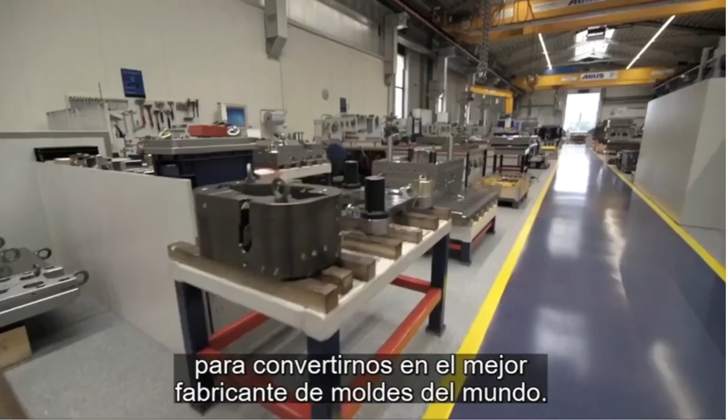It started 20 years ago, when I saw that we had 3-4 different programs in our company. We also had the issue that once you designed it with one software and once with another, the files looked nice, but in the end there were small details which were different.

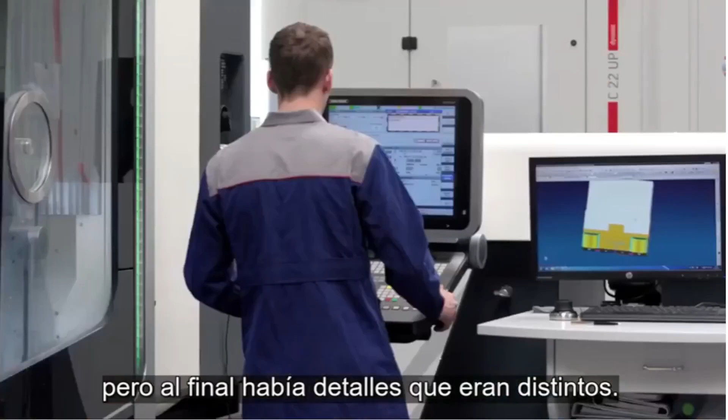Now that we focus on one system, it's easier to bring the part from one department to the other without losing accuracy. We are using Siemens technology in all our areas, so we have a streamlined process from the beginning to the end.

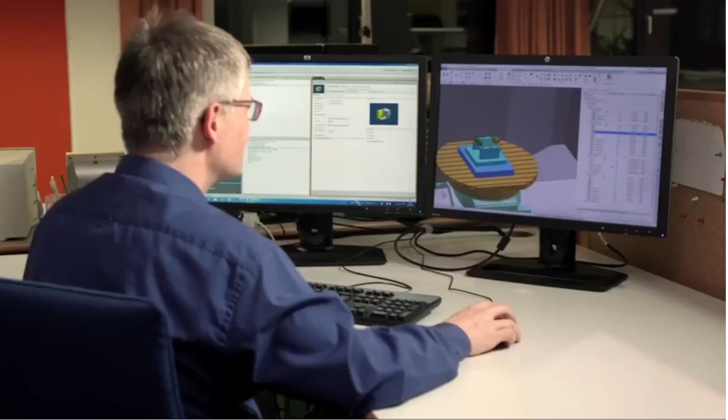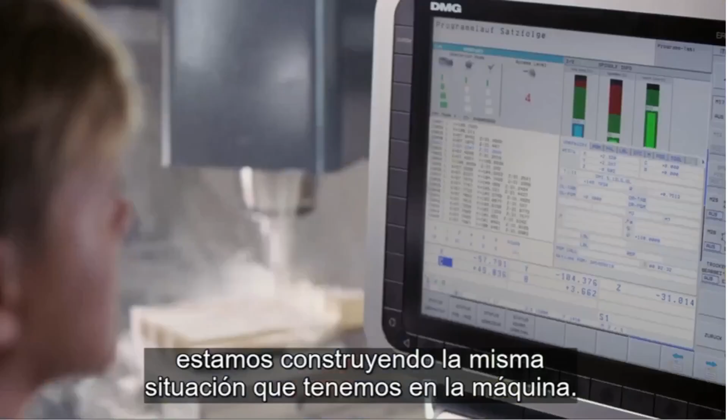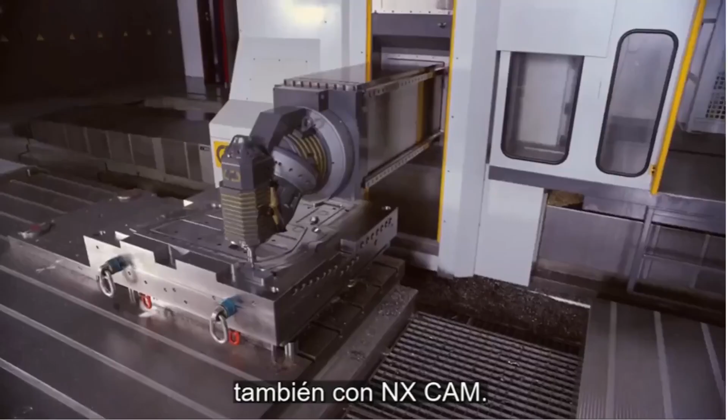It's especially important to have a digital twin in the virtual world, because in the CAM department we're building up the same situation we have on the machine. We are currently driving turning machines with NX CAM, 3-axis milling machines with NX CAM, and 5-axis milling machines also with NX CAM. It's always resulting in lower costs, but also in shorter delivery times to our customers.

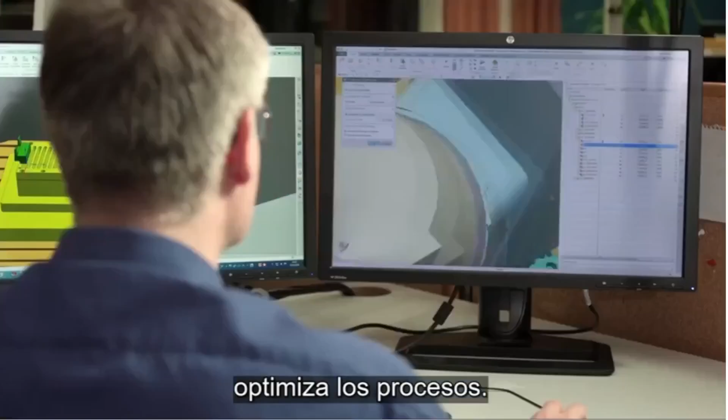Mold making has a lot of different departments, and where Siemens especially helped us was to bring all these departments together. The digital thread is the thing that streamlines the processes. Without the paperwork, we can start parallel processing.

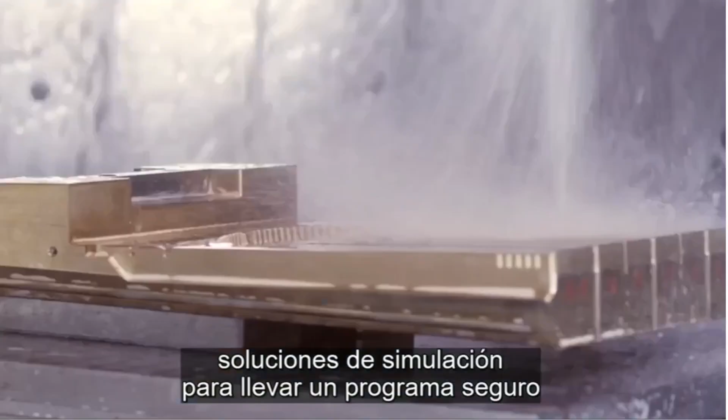They are using Teamcenter to get this part out of the system. They're using the NX CAM function to make the program for the machines. After the post-processing, they're using the simulation functions to bring a safe program to the machine.

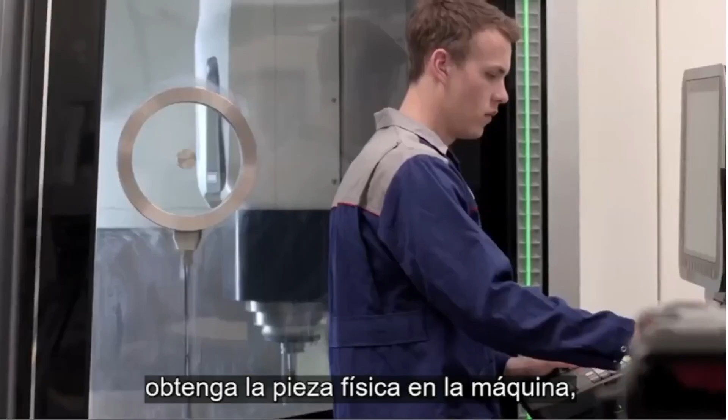Now, even the machine operator can check the CAD model. So before the machine operator gets the physical part on the machine, he can check with the designer to get this fixed early and to get a high quality part.

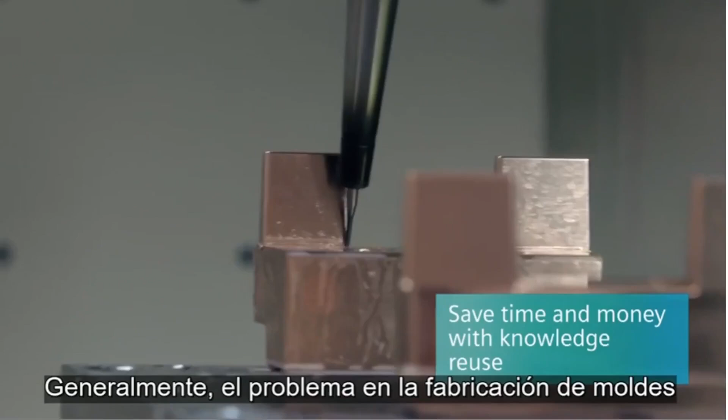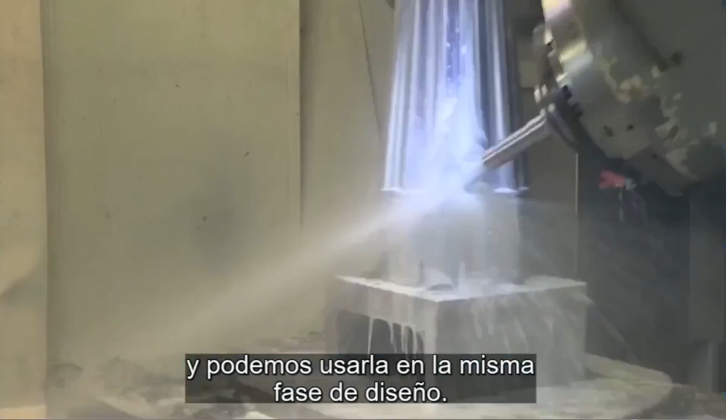Well, the problem in mold making generally is that we are making every piece one single time. And that's where it helps a lot to locate similar items from the past. For example, with Geolus, we can find a part very fast in the system, and we can use the part itself in the design phase, or we can reuse the programs we needed for this part.

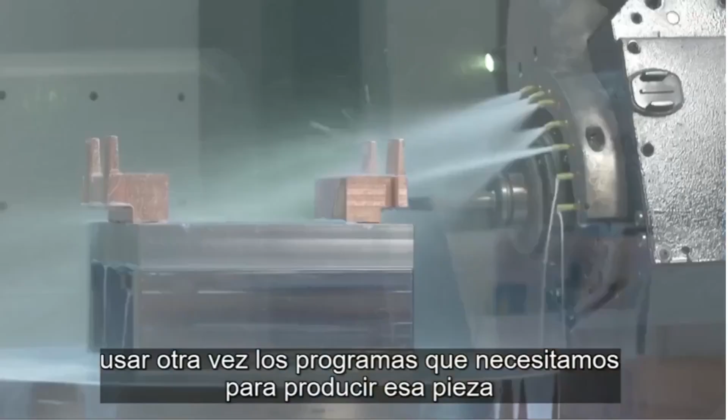The benefit of reusing parts is that we can reuse the programs which we need for producing these parts, so we do not need to repeat all the steps again and again. Siemens plays a very important role in the standardization, which is only possible through Teamcenter, Geolus Search, and Siemens NX. We can save, for example, up to 15-20% of the cost.

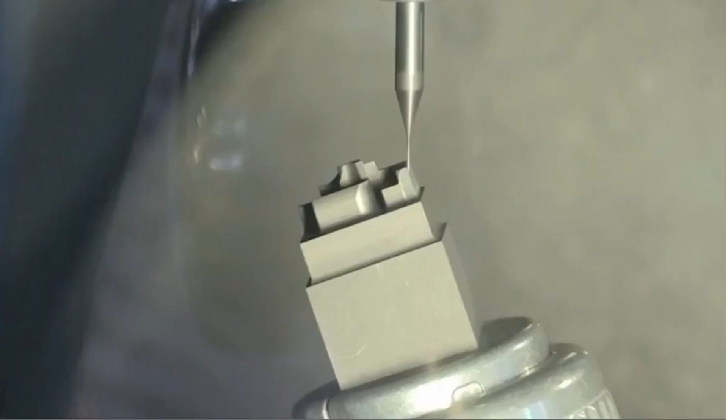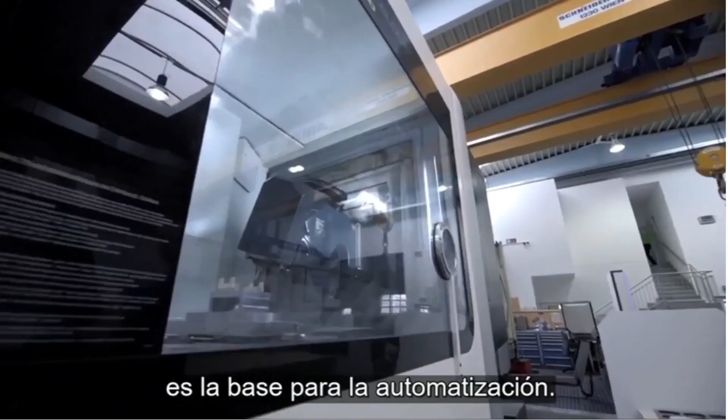The next steps in the future are standardization and automation. We are starting in the CAD, going through CAM, going through assembly, and everything is Siemens. The entire feature-based manufacturing is the basis for the automation.

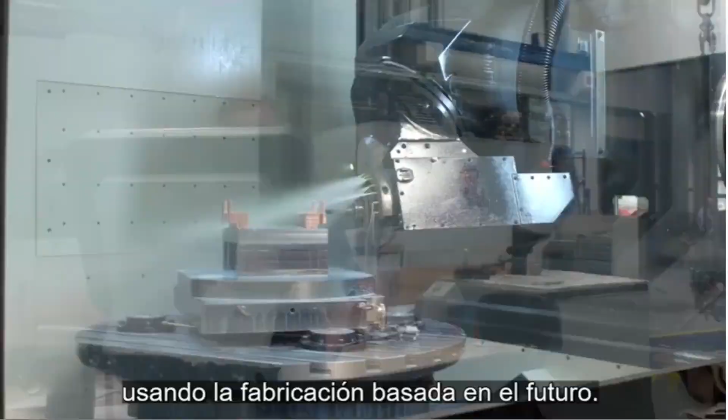I'm actually working on a project to fully automate NC programming of electrodes using feature-based manufacturing. So we want to build up about 80% of our electrodes to machine fully automatic without any human interaction. That's one thing that keeps us ahead of the competitors.

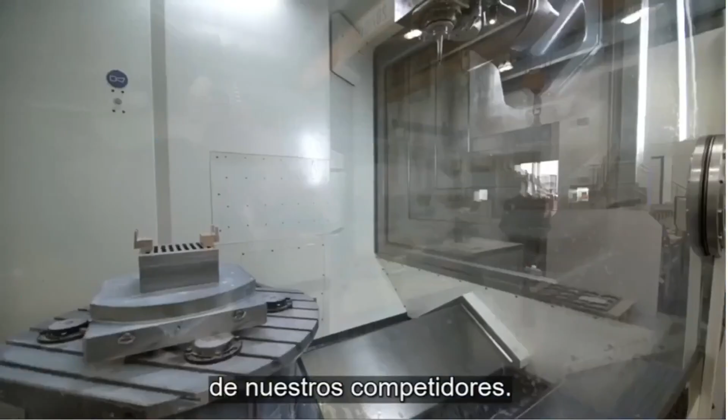Mold making is very competitive, but to be honest, we are not focusing on our competitors. Not at all. We are focusing on ourselves to grow and make the steps forward.

So with the Siemens integrated system, we have one solution for everything, which is always online, always live.